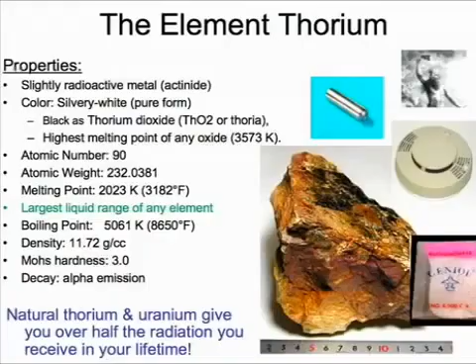Thorium is an element. It is slightly radioactive. It is a metal. It's got a very wide liquid range, some other interesting properties. Thorium is not really commercially used for anything of much these days.

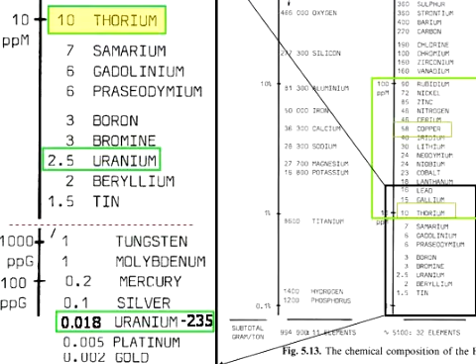This is a log scale of what's available in the Earth's crust. The uranium that you're really interested in, the one fissile material, is orders of magnitude less. Nuclear fission is an incredibly dense source of energy.

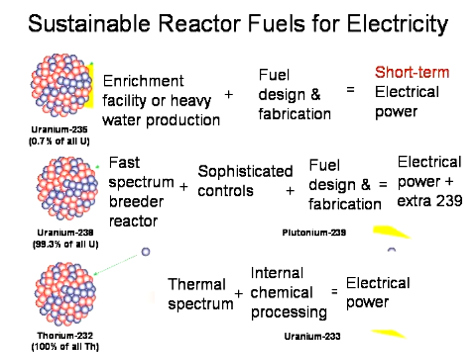Nature gave us three options for fuel. The one on the top is what we use all the time. Now paint yourself in the late 1930s, early 1940s. All three of these could be made to make nuclear energy. So what's the distinction between them?

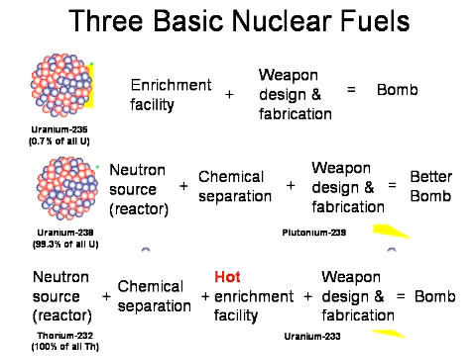Well, it's a wartime scenario. So the first question was, how do we turn it into a weapon? This, to me, is one of the great tragedies of nuclear energy. It was discovered in the context of a war.

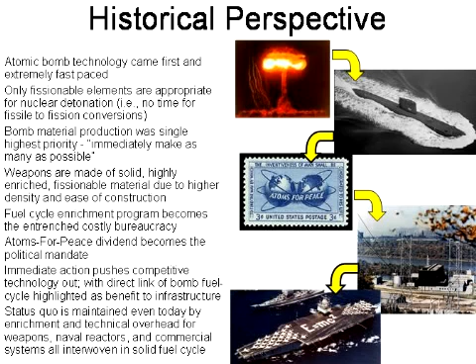We went from weapons to the Nautilus, Eisenhower's Atoms for Peace program, but you're using the same infrastructure, the same people. It wasn't exactly Atoms for Peace in a sense of what's the best way to produce electricity.

All of these were initially evaluated in terms of their destructive potential. Natural uranium, isolate that U-235 and they could make a bomb out of it, and that was Hiroshima. Take the remaining uranium, irradiate it, and you could make plutonium and you could make a bomb out of it.

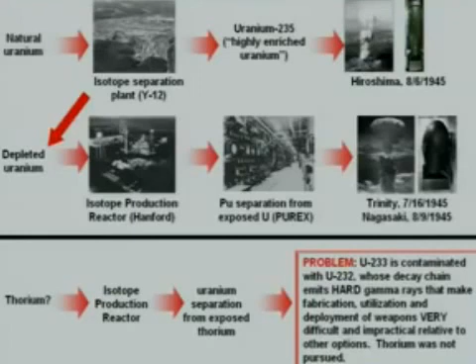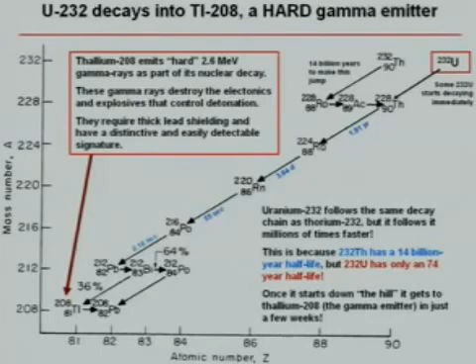Now what about thorium? Could you irradiate that and make a bomb out of it? It's a really bad idea. It's inevitably contaminated with uranium-232. Uranium-232 is decaying and throwing off gammas and basically screwing up your weapon. So thorium's no good for nuclear weapons.

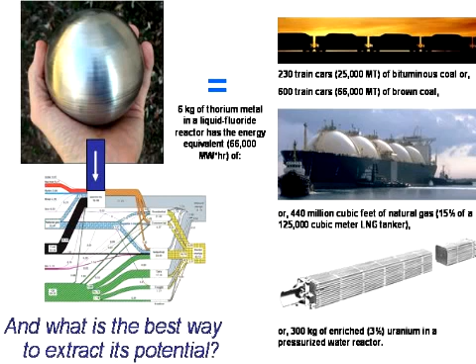You can take a little bit of thorium, put it in a normal reactor, you get some benefits out of it. But it's not an end-all. It doesn't extract all the energy out of that thorium, and it doesn't mitigate all the problems you have with today's nuclear power. Here's what happens in today's light water reactor.

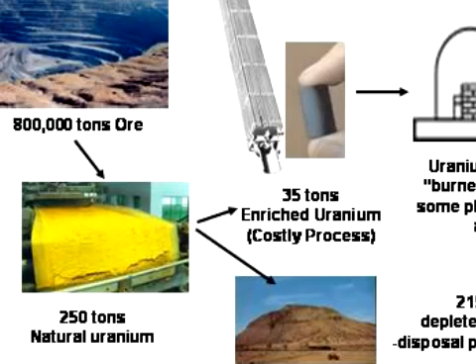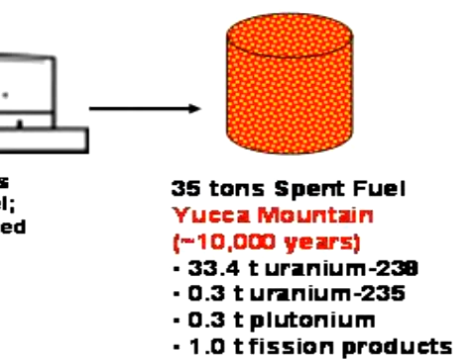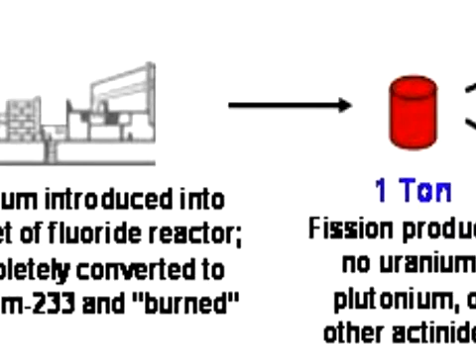A thorium reactor only uses a ton of thorium because we burn all of it. And out of this thing, we get about 0.0001 ton. We get about 100 grams of plutonium.

Thorium-232 has a much lower atomic mass than does uranium-238. And in order to make plutonium, you need many, many more neutron absorptions successively. So the probability of making plutonium in that kind of reactor is much, much less.

Uranium and thorium together, they both have the same energy density if you fission them all up. The real advantage is the ability to fission up the thorium all the way in a thermal reactor.

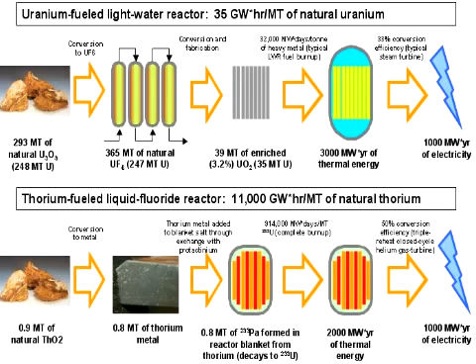Enrico Fermi argued for the plutonium-based economy, and one of the reasons is you get 3 neutrons on average per fission, and you need at least 2. You need 1 to split and 1 to breed your next fuel.

You're using the fast neutrons coming off the reactor from the fissions. And you can see that this number really climbs very good, which means you get a whole lot more than 2, which means you get production of plutonium. For that reason, all the emphasis was turned towards the uranium-plutonium cycle because of the necessity of making nuclear weapons.

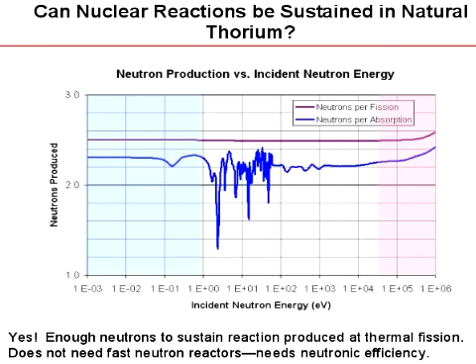And Wigner said, no, that's not such a good idea. Thermal fission's the way to go. We want to use slowed down neutrons. By doing that, we're going to have safer reactors. We're going to have easier to control reactors. And the only way to do this was to use thorium.

This was kind of a fork in the road back during the Manhattan Project. One guy went off one direction to go work uranium-plutonium. The other guy went the other direction to work thorium and uranium-233.

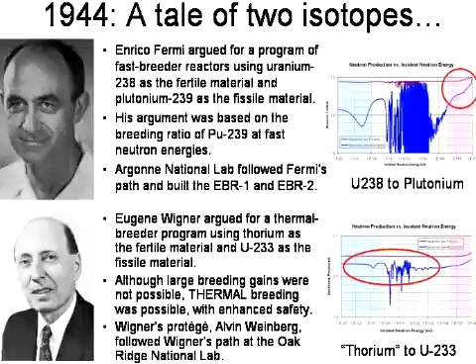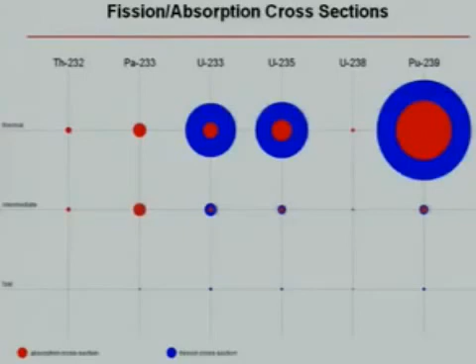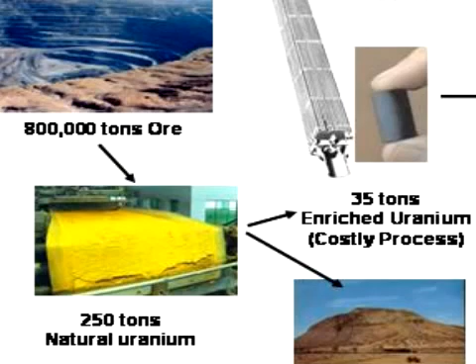Look at the uranium cycle compared to the thorium cycle. You start out with a whole lot more mining with the uranium cycle. You have a whole lot of yellow cake that you make, but then you got to enrich that and make these pellets. It's a very expensive process. You end up with a whole bunch of depleted uranium. You need a very big plant with a vessel that can hold up all the steam or any explosion that can happen here because it's very high pressure, and you produce a whole lot of spent fuel, and you need Yucca Mountain for 10,000 years.

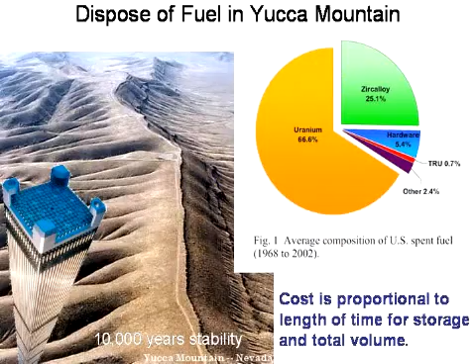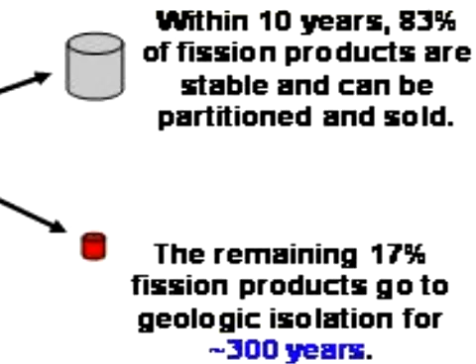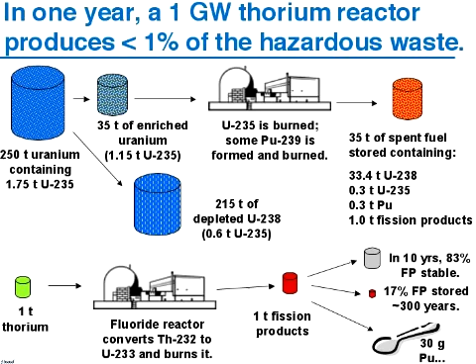The thorium cycle, you need 1 ton. This is for the same amount of energy, 1 gigawatt for 1 year. Much smaller plant, low pressure. Braytons are much smaller, much more efficient. But the big deal here is that in 10 years, most of that, 83%, is going to be back down to safe background levels. And the remainder only needs 300 years for storage, which you can imagine finding in many places around the world that can handle that, and you can imagine making storage vessels that can last 300 years.

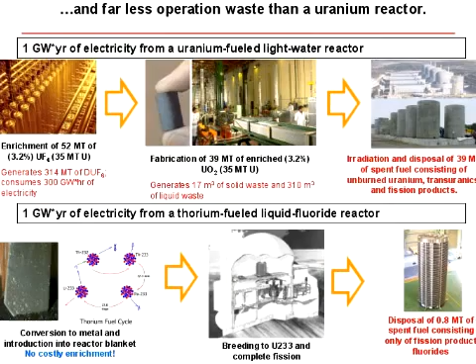Weinberg called it burning the rocks. You could literally mine rock just for its energy content. The average crust of the Earth, a cubic meter has about 12 grams of thorium in it. And that would be enough to power your life for about 10 to 15 years. We have 3,000 tons in storage owned by the United States government that were isolated during the Manhattan Project, and certainly at least 160,000 tons more of reserve in the United States today.

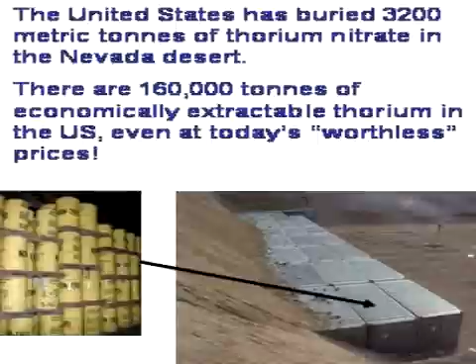So it's plentiful. Going back to Eugene and Enrico, he asked a really logical question: how are you going to prevent losses? Because protactinium is going to gobble up your neutron. We're going to build a fluid-fueled reactor, that's how.

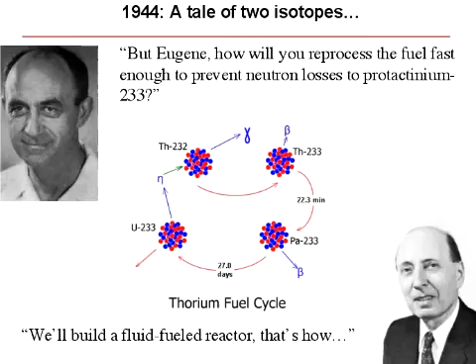As a chemical engineer, he was used to dealing with everything in fluid form. When you use chemicals or you use reactants and so forth, if you've got a solid, first thing you do is turn it into a liquid. When you're done, you can turn it back into a solid. But you do everything as a liquid.

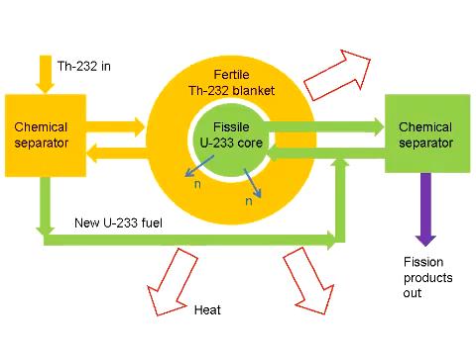When you use it in solid form, you run into those problems with protactinium-233 and some others. But there's another one, that's xenon-135. Xenon-135 is the biggest neutron poison we know of. It just loves to eat neutrons. It's like looking at Jupiter next to Pluto or something like that. I mean, it is just huge.

Wigner realized in liquid form that xenon, being a gas, would just come right out. Reactor operators, they'd be happy to tell you all the troubles they have battling xenon in solid-fueled reactors. It's a real pain in the tail. So off they went in different directions.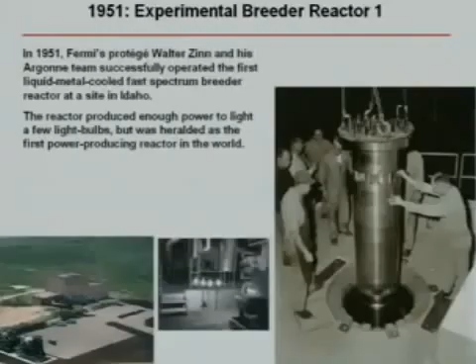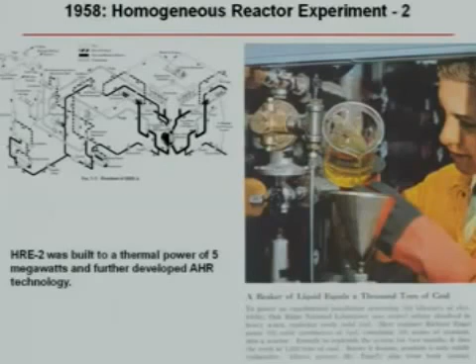Fermi's group building the first liquid metal fast breeder reactors. Wigner's group building an aqueous homogeneous reactor, uranium in water. It had a lot of advantages, but it had one basic disadvantage: there was no aqueous form of thorium. You couldn't dissolve thorium into water. You could dissolve uranium into water, but you couldn't do it with thorium.

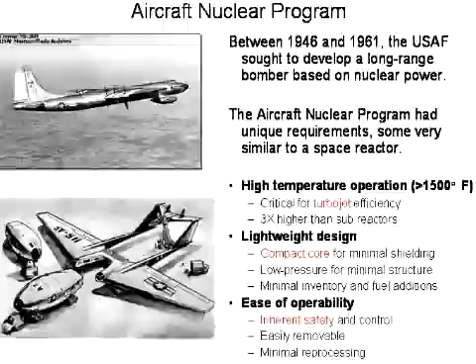Well, they had this program to build an aircraft reactor, and most of them thought it was pretty hokey. They didn't think it was a good idea. In fact, Alvin Weinberg, who ran the lab, said it wasn't like we all of a sudden believed that nuclear airplanes were a good idea. It was the only way we could keep building reactors. A high-temperature reactor could be useful for other purposes, even if it never propelled an airplane.

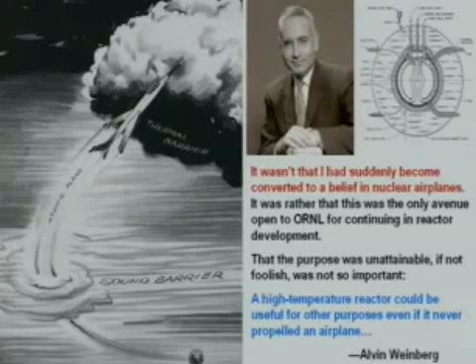Boy, it was super hard. You can only imagine if you're flying a nuclear bomber over Siberia and you run the reactor too hard, and the engineer comes back and says, Captain, we're going to have to shut down for 9 hours because the xenon's overriding our reactivity control.

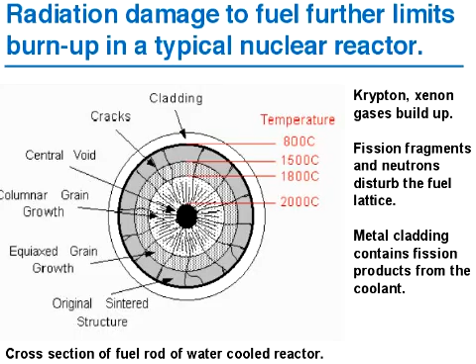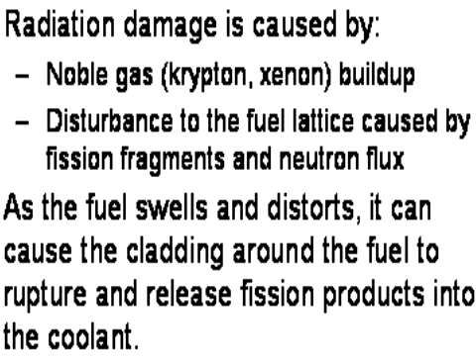I'll just put down right here on the snowfields of Siberia and wait for my xenon to decay away. They learned really quick. They're like, man, we have got to have a reactor that does not have this problem. How are we going to do this? Because we know this water version isn't going to work. Hey, what about a fluoride?

Fluorides are salt. Salts are really, really chemically stable. Because they're so darn happy being what they are, they can go to really high temperatures. And they don't have to have high pressures. This was the birth of the liquid fluoride reactors, to say, can we dissolve uranium and thorium into salts? Well, it turns out, yeah, you can. It's really easy, in fact.

So they built this guy, the aircraft reactor experiment. This was the first liquid fluoride reactor. This thing ran for about 100 hours at some of the highest temperatures ever achieved by a nuclear reactor. And what's even cooler about it was it did it at atmospheric pressure. This wasn't some big high-pressure reactor. This was running at essentially ambient pressure.

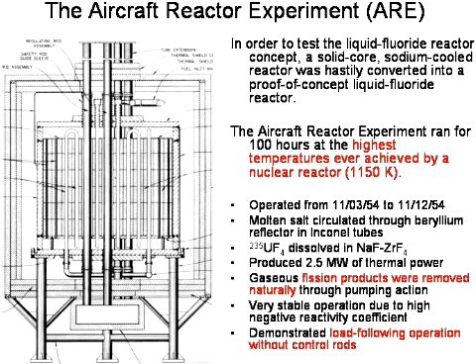And they found out it was self-controlling. As the salt would expand, there was less fuel in the core, and so the reaction rate would slow down. And as the salt got cooler and got denser, there was more fuel in the core, and the reaction rate would increase. This reactor just basically ran itself. As they would increase the heat removal, it would power up. As they would decrease the heat removal, it would power down. You didn't have to use control rods or move it around.

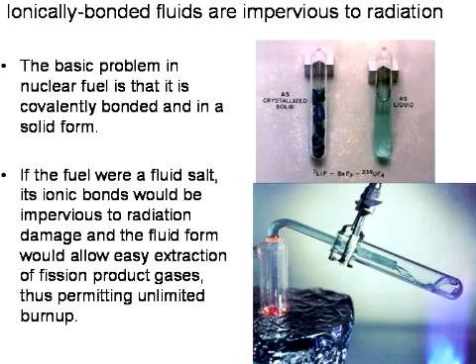It was self-controlling, and it was chemically stable. You could have fission, and it would still not screw up the fuel. And fluoride fuel is the only way to build a high-temperature, high-power density reactor. If you build it out of solid fuel, you're going to be fighting your xenon.

I love this quote: 'Until then, I had never quite appreciated the full significance of the breeder. But now I became obsessed with the idea that humankind's whole future depended on the breeder.' Now, when he says breeder, he means the ability to burn up thorium. And we tend to think of liquid metal breeders, but that's not really what he's talking about.

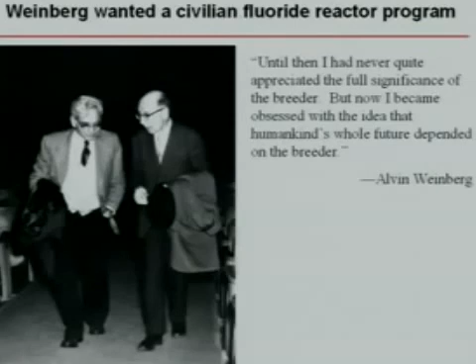I understand that kind of passion because I feel the same way myself. Indeed, if we are going to have sustainable industrial society on this planet, it's going to be dependent on this technology. So this is what the molten salt reactor experiment looked like.

It was a bunch of graphite fuel elements in that tank, and then they would flow the fluoride fuel through it. And they ran this reactor for about 5 years, from 1965 to 1969. And during that time, they demonstrated a lot of the features that we would want ultimately in LFTR. Online refueling, they did it. This is actually a capsule, and they would load it up with new fuel and then just drop it in the reactor. The fuel in the capsule would just dissolve away.

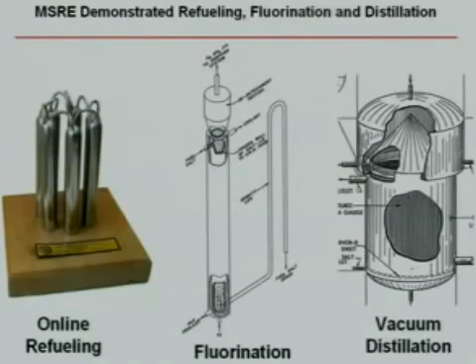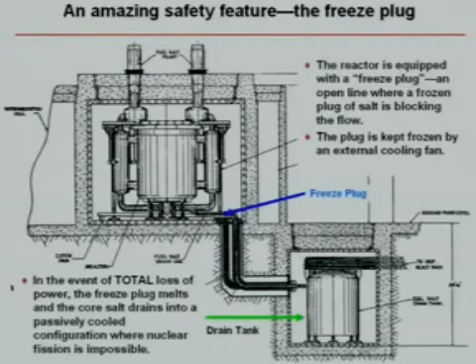When they wanted to take out the uranium, they used fluorination. They could remove all the uranium. And they had this fantastic safety feature. It's called the freeze plug. Because the fuel is so hot, if you cool it down, it will freeze and it will lock up in the pipe. And so they had a little blower over a flattened section of pipe, and it kept part of the salt just frozen right there in the pipe.

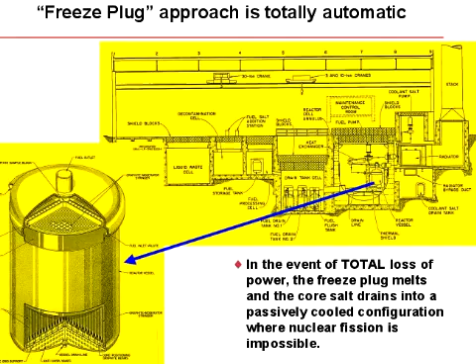If you lost all power to the reactor, if you turned all the lights off, all the juice off, that freeze plug would melt and the salt would drain out into a drain tank that was passively cooled. In most reactors, you have to take the coolant to the reactor in an emergency situation. And that makes them hard to build, because you've got to have the regular core be able to run and make power 99.9% of the time. But then in an emergency case, you've got to be able to get the emergency coolant in and override everything else you designed for all the other times.

This reactor was completely opposite. You could have the core just do what it was supposed to, and then if there was an emergency, it would send the fuel to the place where it was going to be passively cooled. These guys, on Friday afternoon, they'd just go and they'd turn off all the power. And the salt plug would melt.

The thing would drain into the tanks. It would freeze up over the weekend. They'd come back on Monday, turn the heaters on, and pump it out of the tanks back up into the core. They did this over and over and over again.

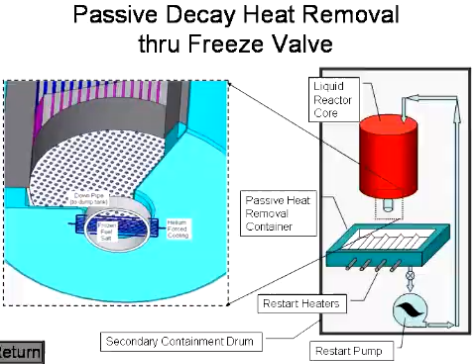The working example is worth stacks of documents and theory. How do you know this works? Well, they did it—it really worked. They demonstrated most of the features that are pertinent to this reactor.

After doing that, they really wanted to investigate how to build the real thing, and they began to go through different design concepts. This was about where they stopped on this design.

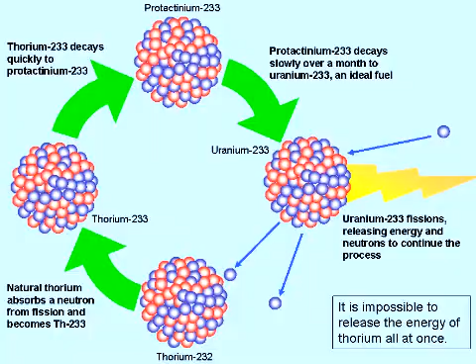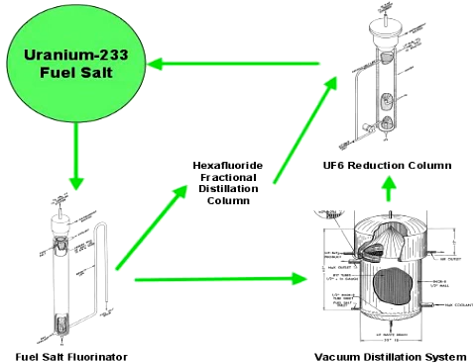A really appealing thing about this approach was they had this super simple fuel cycle. You would make the fuel, fluorinate it out, introduce it into the core, and burn it up. When it was time to reprocess the core, you'd take out the fuel, distill off the good stuff, and you were just left with fission products—a super simple, closed nuclear fuel cycle.

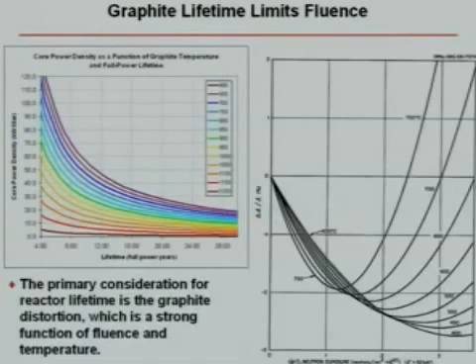Now, the real problem they had was with graphite. First it would contract, and then it would swell under irradiation. As they began to realize this, they thought a lot of our plans for how we were going to build this reactor aren't going to work, just because of tolerancing and how graphite's going to change.

The two-fluid reactor had a plumbing problem. So for us, the plumbing problem's got to be understood and managed, and I think it can be—I have some really good ideas of that. But the overall appeal of the two-fluid reactor is still great, and it really comes from that very, very simple fuel cycle.

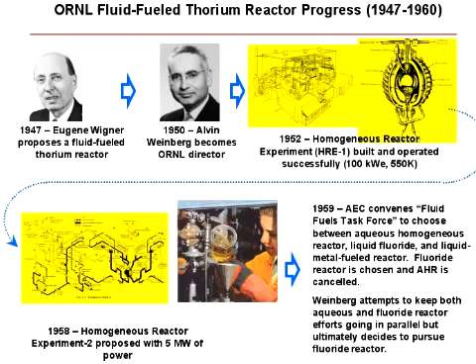So what happened to this? The Atomic Energy Commission was being run by a guy named Milt Shaw, and he was very driven to build the liquid metal fast breeder reactor. These are Weinberg's words: 'Woe be unto any that stood in his way.' Milt was like a bull. He enjoyed congressional confidence, so his position in the AEC was unassailable.

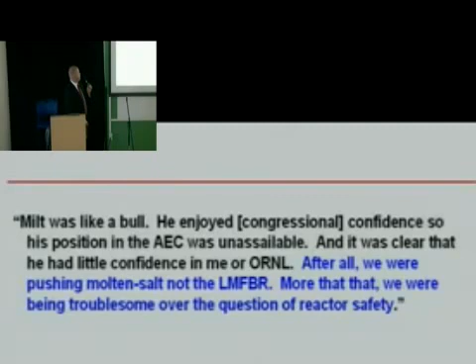It was clear he had little confidence in me or in ORNL. After all, we were pushing molten salt and not the fast breeder. More than that, we were being quite troublesome over the question of reactor safety.

Admiral Rickover and his program, a gigantic organization to build not only the Nautilus, but the whole nuclear Navy—he's done a very good job establishing a safety record. The Navy is excellent in that. Inherently, it's not found in the reactor; it's found in the very strict rules and the very well-trained sailors that run these reactors.

Alvin Weinberg invented the light water reactor. He holds the patent on that design that is so prevalent in the world today. He knew its capabilities and its limitations, and he felt like this was a better approach.

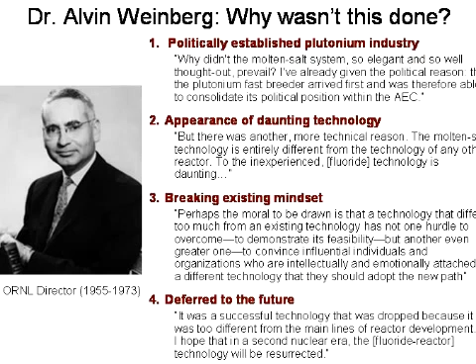There was a congressman who ran the Joint Committee on Atomic Energy, Chet Holifield. He, Milt, and Alvin were having a conversation, and Congressman Holifield got exasperated and said, 'Alvin, if you are so concerned about the safety of reactors, I think it may be time for you to leave nuclear energy.'

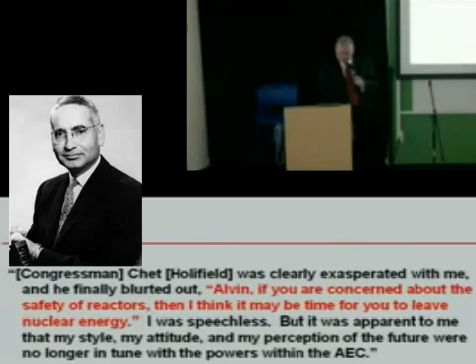Alvin Weinberg got fired. His opinions were at variance with those of the Atomic Energy Commission and congressional leadership. He'd called nuclear energy a Faustian bargain, and he promoted the molten salt breeders. The program was canceled in 1974.

A bunch of Oak Ridge guys did try to keep the torch burning, probably into the 80s, but I've met with some of the old timers—there's really almost nobody there now who was involved in this. The vast majority of them are dead.

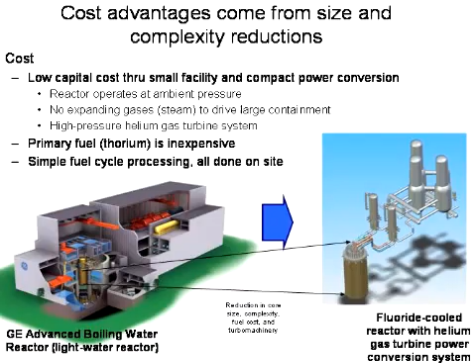There's no reason why any reasonable sized country couldn't go and make this happen quite successfully within their national resources. It's a low fuel price, low capital costs, long life, low maintenance. You've got homogeneous mixing, which means you don't have any hot spots, which is a real concern in conventional reactors—one spot gets hotter and continues to get hotter until you have a meltdown.

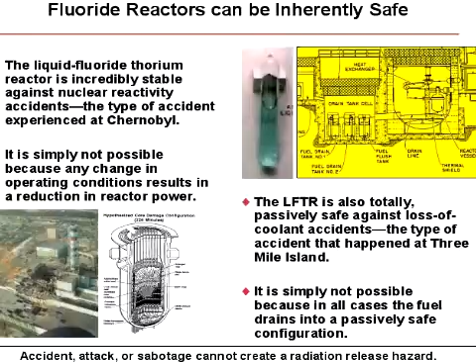You get to burn up all the fuel because it's constantly being moved around in the reactor, and no fuel shutdowns because you can fuel this continuously. The cost of this whole system would be significantly less than existing nuclear power plants.

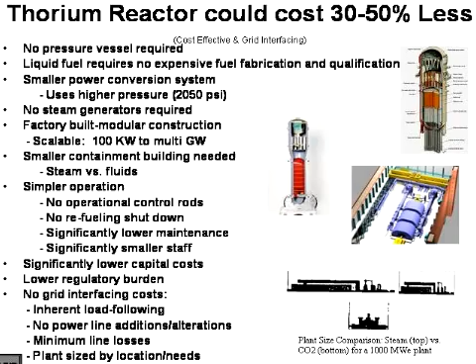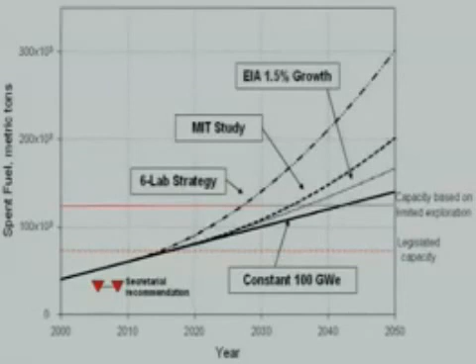We've got spent nuclear fuel accumulating from our nuclear reactors. This is the amount of spent nuclear fuel we have. It's not going to be long before our rate of generation of spent nuclear fuel is going to have Yucca Mountain pretty full.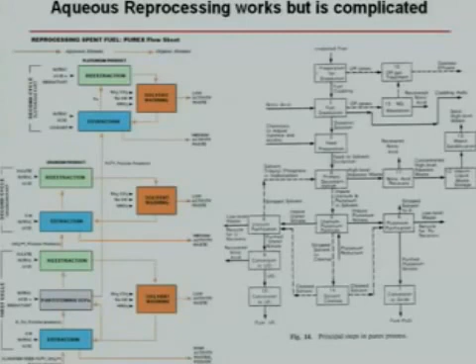If we start building more light water reactors, we're going to hit those limits a lot sooner. Our current approach to nuclear reprocessing is based on dissolving nuclear fuel in nitric acid, and it's a very complicated, expensive process. First you take a solid and turn it into a liquid, then you separate all the piece parts and components out, and at the end you take this liquid and turn it back into a solid again.

Now, the French have really mastered this. They have a facility at La Hague where they do this, but it's a big facility, and they spend a lot of money to make this work. We know it's possible, but it's difficult.

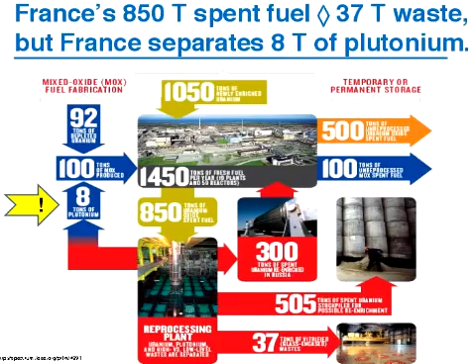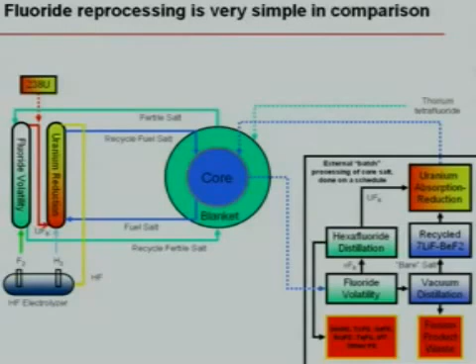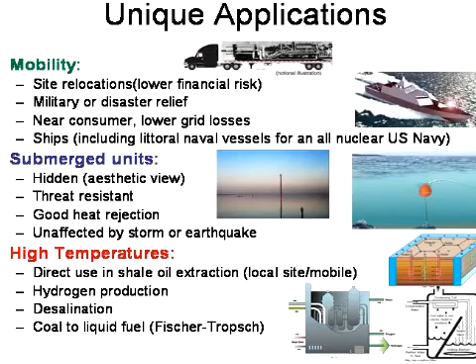On the other hand, the reprocessing for the fluoride reactor is really simple. We just fluorinate the blanket and introduce it into the core. This is a complete nuclear fuel cycle boiled down to just a handful of steps. This should scale up as well as scale down onto the back of a semi-trailer. It can go to a site for shale oil extraction, and it couples very well with desalination for water processes and hydrogen production, because of the high temperature nature of the reactor core.

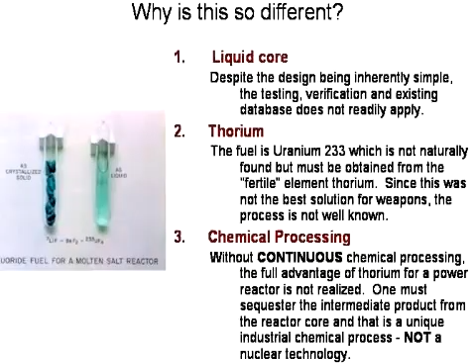What's the biggest obstacle? Is it funding? Is it political? One of the basic problems is this stuff is completely different than what they do in the nuclear world today. A few weeks ago I was at the American Nuclear Society conference, which is the nexus of all the best and brightest engineers in the field. Nobody knows about this stuff, and I don't mean that in a disparaging way. These are very, very smart people.

I've almost finished my master's degree in nuclear engineering. In that time, I had one course that talked about breeding, and during that course, about 10 minutes talked about thorium, and during that 10 minutes, none of it mentioned fluoride reactors. So it's entirely possible to go to nuclear engineering school, get a PhD, and never be exposed to any of this stuff. Then when you get in the field and learn how to run real reactors with solid cores, control rods, feed water, and all this other stuff, it's like the difference between a typewriter and a word processor. You'll get the same thing in the end, but what's under the hood is utterly and completely different.

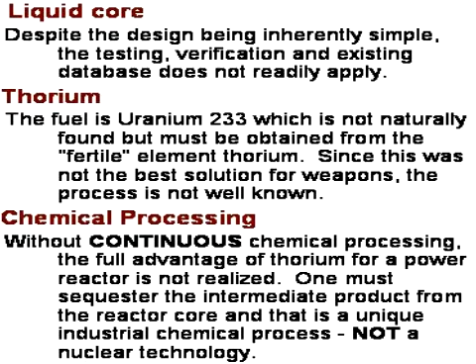So I think the real nuclear industry looks at this and says, well, what are we going to do with it? We'd be starting from scratch. It's great for an entrepreneur. It's rough for the legacy folks who would want to get into this.

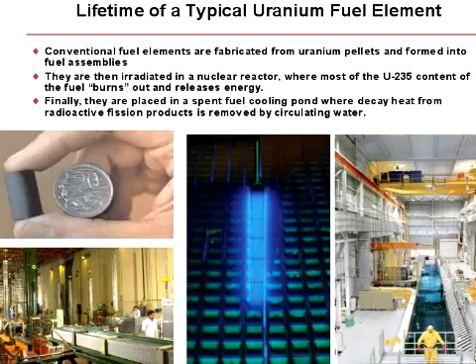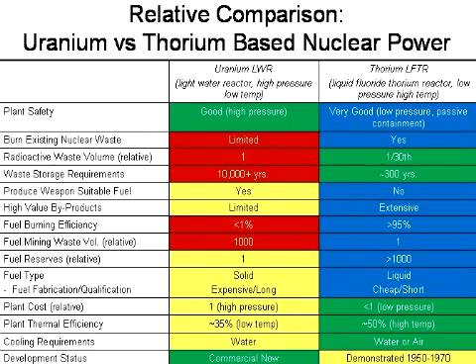The nuclear energy industry today makes all their money making fuel elements. It's very expensive, very exacting - little zirconium cans with precisely measured oxides inside. This would make all the fuel at the plant, and that revenue stream would go away. None of the incumbent players are really interested in designing a reactor that cuts off their big revenue stream in the future. Back in the 60s, reactor vendors would sell reactors at a slight loss in order to lock in a long-term fuel fabrication contract - the razor blades approach. The whole cost structure around today's nuclear industry is really not amenable to this cheap, simple, easy-to-process fuel.

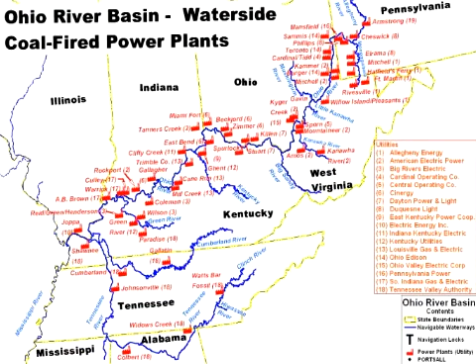We know that to tackle our global warming concerns, we're going to have to go after, number one, coal, and number two, transportation. Between this and electric cars, we could make a big difference. As an engineer, I can look at this and see there are really tangible, easy-to-do steps, already demonstrated, based on well-understood chemistry that's been around 100 years, that we can go and do to make this happen. This isn't that hard.

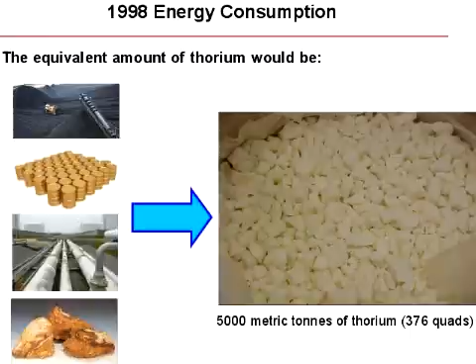In conclusion, this gives us options for inherently safe, proliferation-resistant, economic nuclear power that can last thousands, if not millions of years. This really could be the silver bullet that enables us to power our industrial society. And this also offers real options for solving the long-term issues surrounding our existing spent nuclear fuel, and ultimately preventing the formation of new transuranic waste.